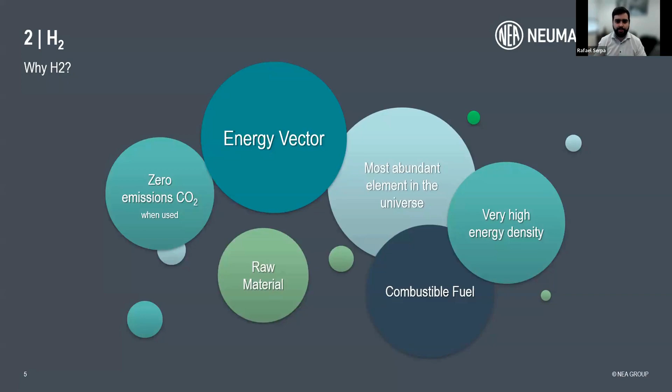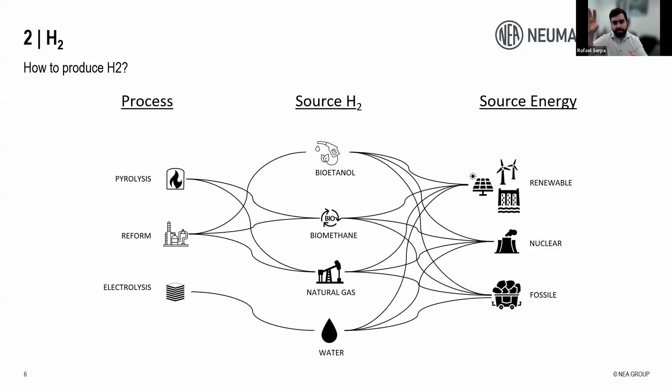And how to produce hydrogen? Normally you need a process to obtain the hydrogen molecule. You need a source of this hydrogen, where you can get it from, and you need energy. There are different processes, different sources, different energy sources, and you can combine them. These are just examples; there are more than what I'm showing. By combining them in multiple ways, you can produce hydrogen as a gas. And depending on how you combine them, you have different colors. That's how we are labeling this hydrogen molecule.

It's important to say that today, more than 95% of our hydrogen is gray hydrogen, which comes from the reforming of fossil natural gas with energy from a fossil source. So you have lots of CO2 emission, lots of non-sustainable cycles inside this production route. And it's important to see in this graph that this is not the only route. We have lots of alternatives. When we talk about green hydrogen, one of the most promising ones, we are talking about electrolysis of water with renewable energy, mostly solar, wind power, and hydraulic energy generation.

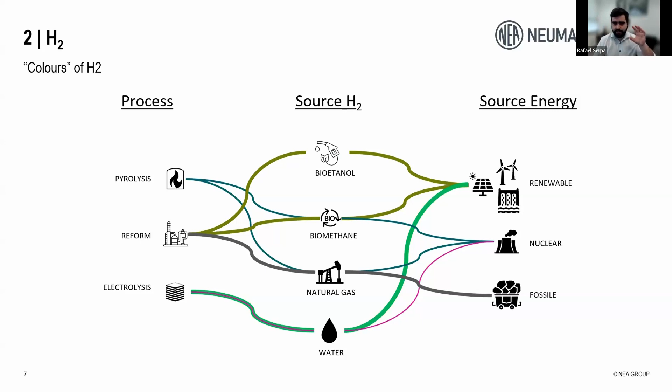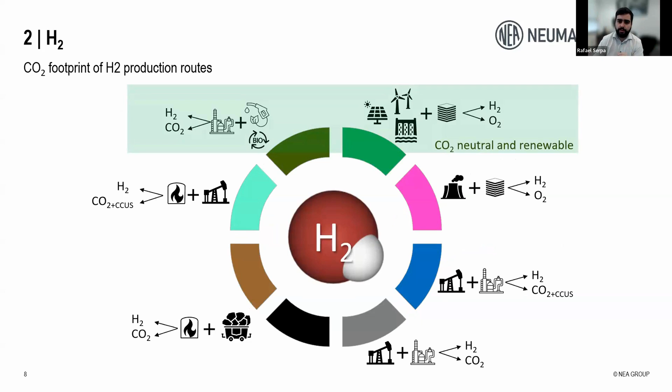This color is important to have in mind, because what it means in the end is the CO2 footprint of these hydrogen production routes, the impact on the environment of these choices. You might have hydrogen generation through all these viable routes. They are all producing the same molecule, but you have to look at what you're leaving behind when you use them. You can have CO2 emitting non-renewable routes. As I said, 95% plus of our hydrogen today is gray hydrogen, the reforming of natural gas with non-renewable energy.

You have CO2 neutral routes, but non-renewable. For example, if you take gray hydrogen and capture the CO2, you have blue hydrogen, as it's labeled. But this is not renewable, because natural gas is a fossil source. And you have, of course, the CO2 neutral and renewable sources, for example the reforming of bio hydrocarbons like bioethanol or biomethane, or electrolysis of water with renewable energy. This is just to give context on these possible technology routes and what to do with them.

Today, when we go to the applications of this hydrogen, we see three main applications for the molecule. It can be used as a fuel; it can be burned, it's a combustible gas. It can be used as an industry raw material, so you use hydrogen as a chemical component for the production of different elements in different industries. For example, hydrogenation of fats to produce food.

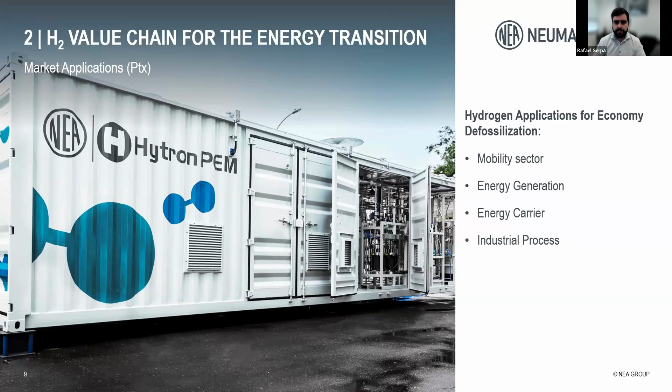So a very quick example, which touched me, I'm Brazilian. We in Brazil have lots of renewable energy generation. We have potential to generate even more, and we can export this energy using hydrogen as an energy carrier to Europe, which is deficient in energy generation because they consume much more than they generate. And they also consume a lot of non-renewable energy today. So these are the main applications that we see for hydrogen in the industry.

So you need to generate economic, cheap, renewable energy to support all this value chain, because in the end, we're talking about energy. After you have the energy, which can come from solar, wind, hydraulic, biomass, can come from fossil sources. That's not what we want, but it's also energy. You can use this energy for conversion and processing. So you can convert this energy into hydrogen. And as I said, there are different routes for converting this energy into hydrogen.

And after you convert this gas, hydrogen has a very high energy density, and it's very abundant, but it's a very light gas. The molecule is very small, and it's very hard to handle this gas. Besides being explosive, it's combustible, it's also a very difficult gas to handle because of the size of the molecule.

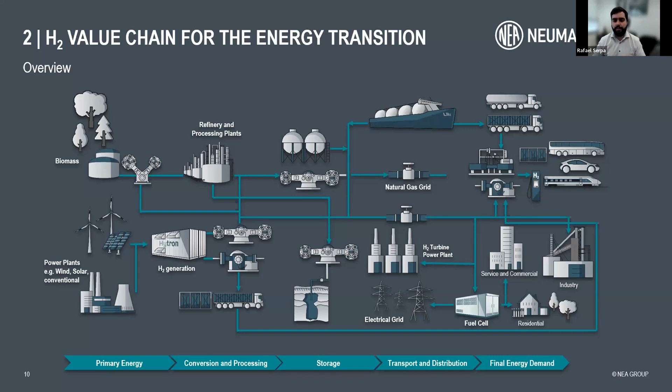And you reconvert it for your final use, which can be power to X, whatever is your X in the end. So it can be mobility, you can use it for hydrogen mobility, you can reconvert it to electricity, to use electricity in its several ways of application. You can use it for heating, you can burn it, you can use it again as a raw material of industry, or you can inject this energy back in the grid where you have markets deficient in energy production. So different steps that the hydrogen has to go through before it reaches its final application. Lots of technology behind.

And here we can talk about the practice. So lots of theory, but also you need to talk about the details. So when you are going to attend all these complexities of the technology before you reach your final utilization for the hydrogen, there's a huge industry behind. This is comparable to oil and gas refineries in complexity. And the requirements for defossilization of the economy are several.

I have here just some examples. What is the discharge pressure of this hydrogen? What is the communication protocol to integrate all these technologies? What is the purity of the gas, of the hydrogen and the oxygen, if we're talking about electrolysis? How are the energy disturbances going to affect the grid? This is a big question. So this is something that's popping up a lot recently.

How the pressure disturbances are going to affect the different equipment. So one of the big steps in the hydrogen value chain is compression. You need to compress this gas for storage and transport. And you have this flow of the gas through the process, and you have different pressures along the value chain. How the pressure disturbances are going to affect these different steps.

What about the water? If we talk about electrolysis, the water consumption is a big issue in many countries of the world. So you go to Chile, which can be a powerhouse for the world, and they want to produce hydrogen in Antofagasta, in Atacama, where they have lots of sun, but they have no water. Where does this water come from? How efficient is your water consumption and water generation?

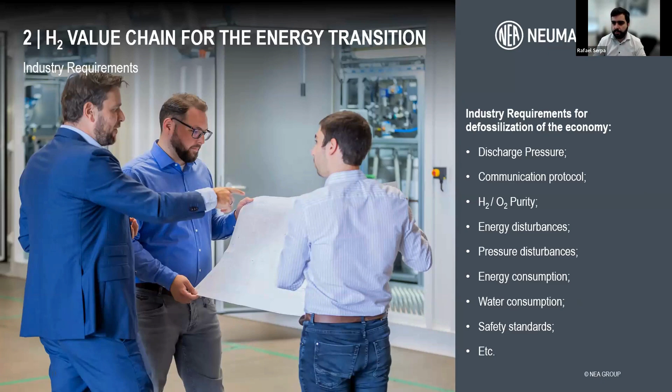So when we talk about policies, when we talk about finances, when we talk with the government, the banks, it's also important to make them aware that it's not so simple just to take energy, generate hydrogen, and use this hydrogen. There are lots of other points which need to be attended behind, and the technology industry is here for that. It needs lots and lots of knowledge, lots of qualified manpower.

And some practical examples. So first we had the primary energy. You can see here in the bottom the steps from our H2 value chain. After you generate the primary energy, you need to convert and process. As I said, there are several routes. One of them is, for example, PEM electrolysis of water for generation of hydrogen and oxygen. And this is one of the examples that we have in our portfolio, that we are experts on, attending all these specifications, all this complexity that is behind such equipment.

So the picture here, just to illustrate, is a PEM electrolysis module. This one is for 2 megawatt, just as an example, but they can go up to 5 megawatt and can be very modular and installed to attend the high demand of hubs, for example. So in Brazil, we have some hubs in the Northeast, as an example, and they are talking about hundreds of megawatts or gigawatts. How to reach these numbers?

Because it's not just about generating the electricity. You can have lots of wind turbines, solar panels to generate the electricity, but then you need to attend the hydrogen generation. And how do you reach gigawatt scale in these hubs? You need modular, simplified solutions that you can later on operate with a simple organization. And this is an example. So the PEM electrolyzers can go up to 5 megawatt in a module.

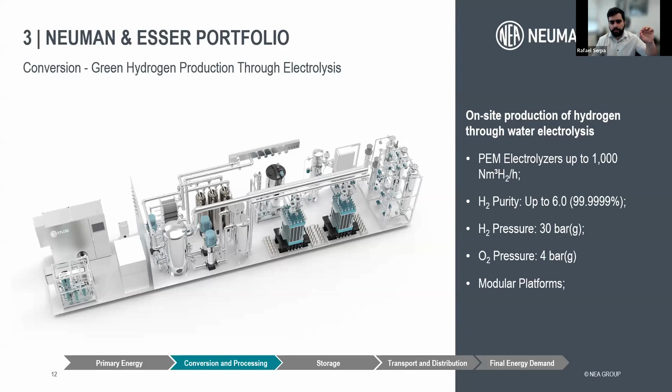Another example in our value chain, we move from conversion and processing to storage. So again, we talked about storage. It didn't change the color, sorry, but we're talking about storage. We talked about salt caverns. We talked about liquefied, compressed hydrogen. We talked about ammonia. And it's hard today to imagine a world, an industry, an economy without compressors.

So we end users, we citizens might not see compressors very often, but they are everywhere. Everything that we have on site, on your desks or wherever you are, had the usage of compressors at some point. And this is the same for hydrogen. You need compressors for storage and transportation or reconversion of hydrogen in all its forms. And this is something, again, that cannot be underestimated.

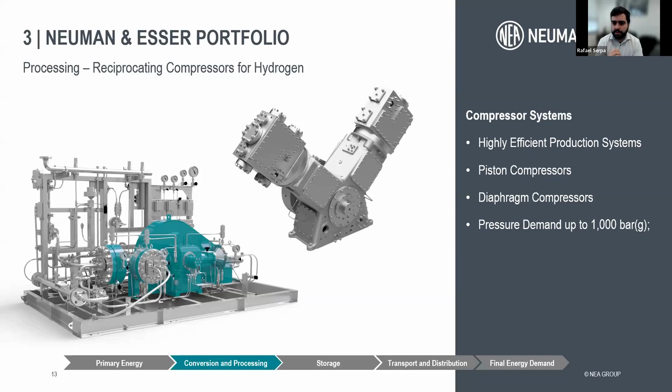So we started saying that we cannot underestimate technology behind hydrogen. And technology behind hydrogen is not just generation. You saw the value chain. You cannot underestimate, for example, the compressors. Compressor technology is very well established. This is something that Neuman & Esser, for example, does for more than 200 years. But just because it is consolidated, it doesn't mean that we should not pay attention to that, because it's a complex process with all its requirements, standards, and reliable technology is required here too.

And then we go to storage. After you generate, you compress, you transform, you process this hydrogen, you need to store it, as I said. And here, just an example. You can store, for example, here, it's compressed buffers. This is a low pressure buffer between the electrolyzer, which is in the back, and the compressor, which is the blue one. We have this big vessel, which is the low pressure, and after the compressor, the bottles, which are upright, these are the high pressure storage of hydrogen. So this is also another point in the value chain.

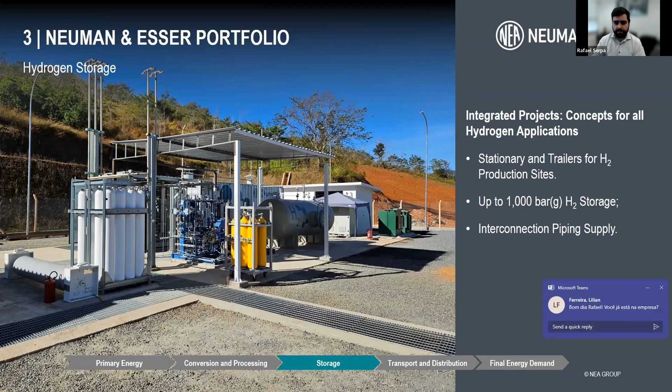Again, now it changed the colors. And we have transport and distribution and final energy demand. So here, just one example, again, back to the practical portfolio of Neuman & Esser. You can have hydrogen as energy vector for mobility, hydrogen cars powered by fuel cells. And for filling up these cars, you need hydrogen refueling stations. So in these hydrogen refueling stations, you can have the hydrogen generation or not, but you need the compression, you need the storage, you need the dispensing. So effectively where you fuel the car with hydrogen.

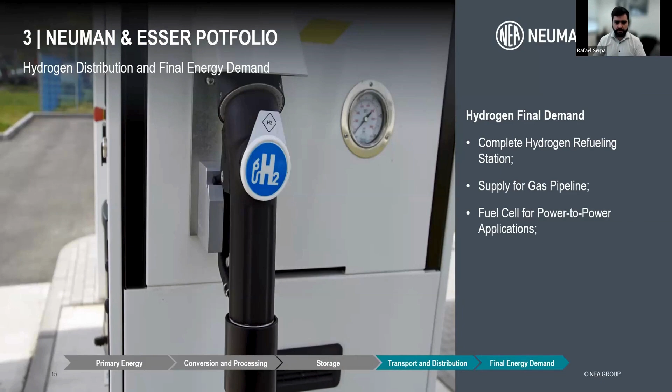And again, lots of technology behind. And we are talking just about the gas. We're not talking about the car itself, because when you go to a car manufacturer, Toyota, Hyundai, the Chinese, Mercedes, BMW, lots of them, they all have also lots of technology behind their products, which are the cars. So this is an example of final use, but you have several of them.

And here, just to give some practical examples, what Neuman & Esser is doing in our region. So Neuman & Esser Brazil, which is where I am, we are responsible for South America, Latin America, actually. And here we have some interesting projects which are running. So some practical ones, this is a project in the northeast of Brazil, in the energy company called EDP, where they use hydrogen to cool down their turbines. So as I said, hydrogen has different applications, not just an energy carrier. So they use the hydrogen to cool down their power plant. This is still the largest PEM electrolyzer in operation in South America, which was manufactured by us here in Brazil.

Another example, this is a refinery of ENAP. ENAP is the state-owned petroleum company of Chile, and they are installing a hydrogen generation system inside the refinery to blend with natural gas, to burn this blend and reduce the CO2 footprint of their fuel consumption. So this is another example of utilization of hydrogen, using now this technology on board.

Another example, hydrogen refueling station, which was just started up. This was the first Brazilian high pressure refueling station in Minas Gerais state, so my state, very proud of it. And this will be the first one operational for high pressure mobility with vehicles, not only small vehicles, but also buses, trucks, cars, forklifts, whatever we're talking about mobility.

Here, another example. The first ones were industrial examples, so practical day-by-day use applications. But here we're also talking about new routes, so new technologies that we develop. This is an ethanol reformer, bioethanol reformer. One of the routes I've shown, which is CO2 neutral and renewable, is the reform of hydrocarbons, and bioethanol is a hydrocarbon.

And you can take this bioethanol, which Brazil, United States, Indonesia, India produce a lot. You can reform this hydrocarbon, ethanol, into CO2 and hydrogen. You can capture the CO2, so you are even CO2 negative, if possible. And you can use this hydrogen, which is not green because it doesn't come from electrolysis of water, but it's a renewable and sustainable route also possible.

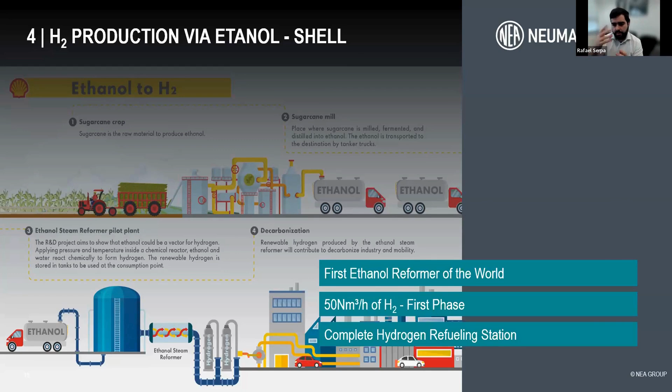This is the first ethanol reformer in the world, which we are developing together with Shell. And the main application for this is a refueling station, so mobility again. But also this route of production of hydrogen can be used for all the typical applications of hydrogen.

And another R&D example is a project that we have with Sinopec and Repsol, which is the production of green hydrocarbons. So when you have hydrogen, green hydrogen, and you have CO, not CO2, but CO, you can produce hydrocarbons in a synthesis for these green hydrocarbons. And they can be used for several applications. You can use it for sustainable aviation fuel, lubrication oils, paraffins, green fuels.

So you can build, this is the beauty of this project. With these reactors, this processing plant, you can build pretty much any hydrocarbon you would like to have in a green way, instead of taking these hydrocarbons from a typical refinery of petroleum. This is a very nice project.

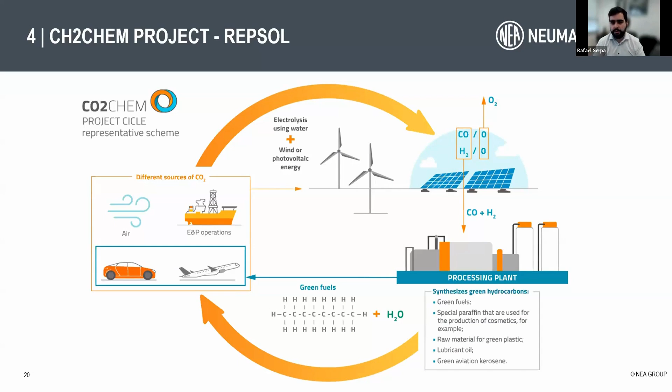And we know about the importance of hydrogen in the decarbonization of an industry. And we also know that the technology industry, us included, we need to ramp up a lot and quickly to meet these decarbonization targets. And we believe in this ramp up, and that's why we're investing a lot. So just some examples of investments that we are doing here in Belo Horizonte, where I sit in Brazil. We are investing in the expansion of our facilities, which we are going to inaugurate still this year, to produce more electrolyzers, compressors, and hydrogen refueling stations.

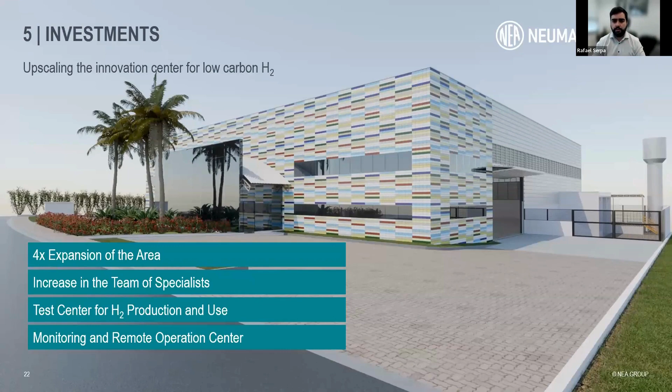We are also investing in our R&D center in São Paulo, also in Brazil, where all these R&D projects that I've shown are being developed and constructed, the pilot plants. We are investing in Germany, in our headquarters, so we are building a new campus, which will also host the electrolyzer production center, but also releasing space for the ramp up of our compressor manufacturing.

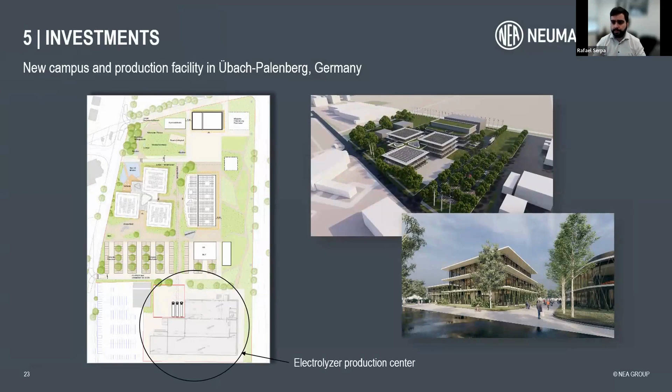And by all that, we want to reinforce the importance of not underestimating the technology in the hydrogen economy for the decarbonization of our industry and society. It's not only about renewable energy. It's surely about renewable energy, which also has its particularities. It's not only about equipment, so the capital expenditure on these platforms, because afterwards we need to live with these production plants after they are set.

So in the beautiful future that we have in 2030, 40, 50, we have these huge hydrogen production plants, gigawatts, terawatts of hydrogen being produced, and we need to live with these production plants after they are set in the future. So we need to qualify workforce, which is, again, another very important pillar. We need reliable partners for the operation of these plants. It's not about just setting them up, it's living with them, maintaining them in an efficient and economic production of hydrogen. This is the final message that I want to bring from all the presentation. And thank you very much.